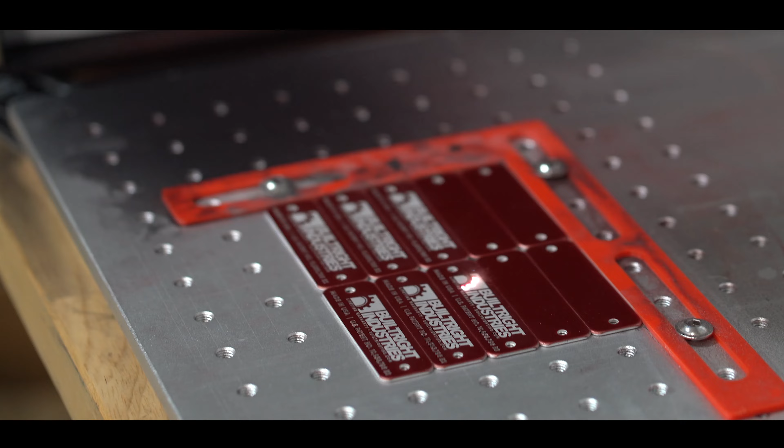All right, so last week you saw us do some 3D scanning and preliminary design of our Jeep dash mount, as well as experimenting with a MOLLE panel solution in the front cargo area of the Rivian. This week we're going to prototype both of those so that we can evaluate them for manufacturing, also for feasibility, and does it work for us? So check it out.

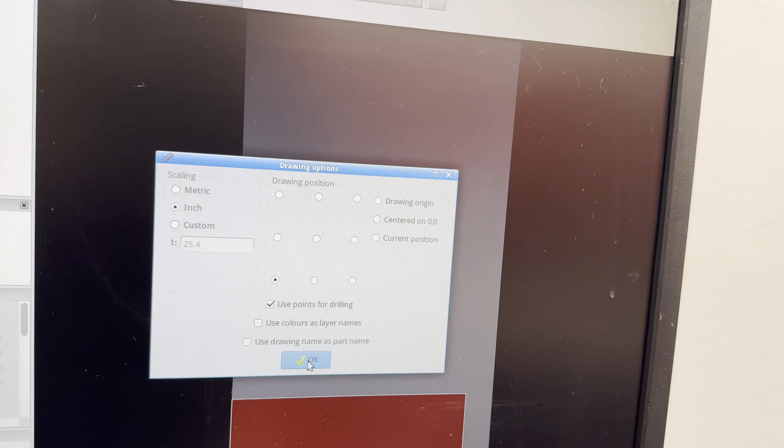All right, so I'm out here at the plasma table. I've got a piece of 11 gauge on there from when we did the Cybertruck panels. So I'm gonna pull our model of the top plate in, import a drawing, top plate.

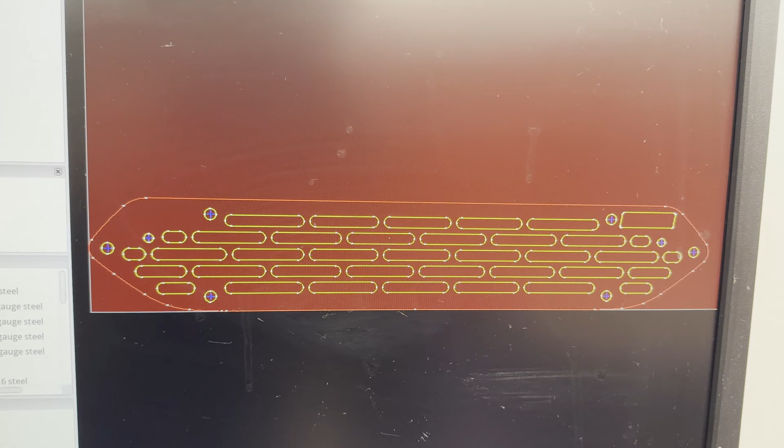All right, that looks about right. So the only thing I'm noticing is that this will be cutting basically from the bottom out to the top, and I want the clean part to be on the top. The cut is cleaner on the top. So I'm gonna flip this around Y. Yeah, okay, so this is exactly what we're looking for. We got the logo up here, we got the rest of this.

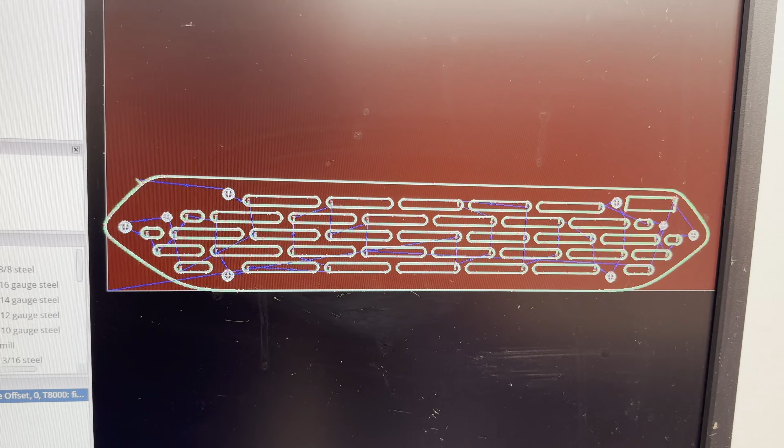So I'm gonna add an operation for plasma cut, outside offset. We're gonna move all the way down here to fine cut. There's tons of options here, but we have fine cut consumables. Say okay, quick sanity check, that looks correct. So now I'm gonna export the G code and we'll get this thing set up.

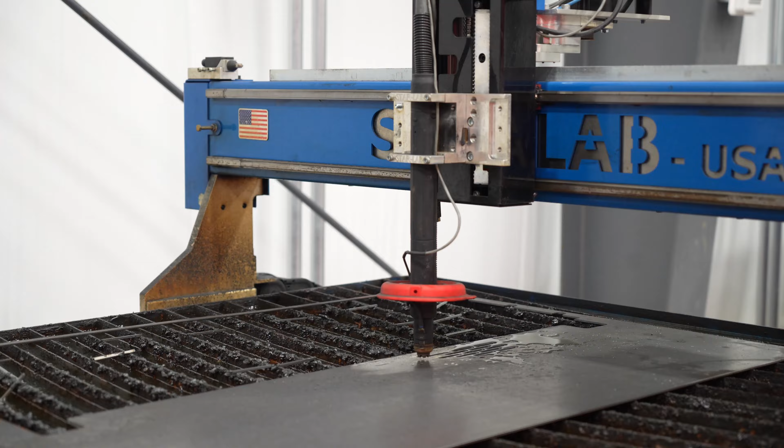All right, so we got our G code exported. We've got Command CNC open with our file here. I've got the plasma table centered down here. We've got a good clean origin. I wiped off the material. We're a little low on fluid here. The table's looking kind of gross, but I'm gonna give it a shot.

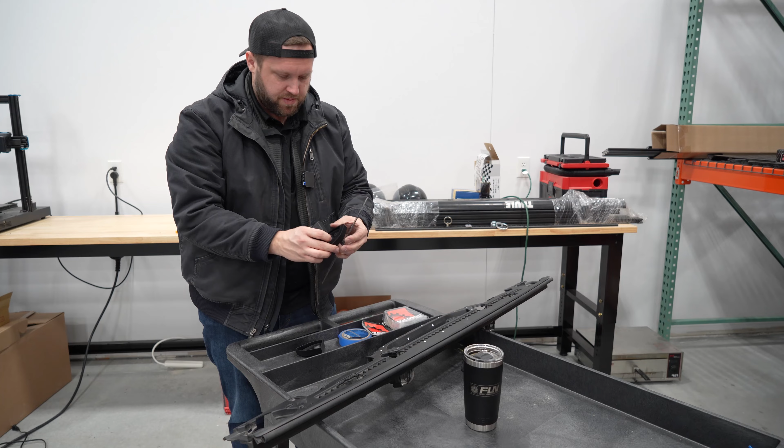All right, so we got a good clean cutout of the top plate. I'm gonna do a little bit of cleanup on it. We'll hit it with some paint and then we'll go and test fit it.

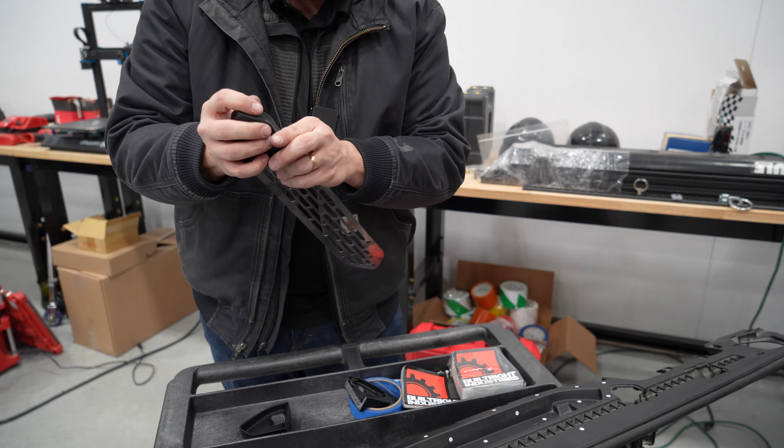All right, so we've got our two 3D printed pieces here. I printed these last night. Remember we started with this shell piece last week to verify the contours here, and this is getting a little bit closer to a production part. And then we've got this top plate that we just cut. I'm gonna do a little bit of a sanity check fit here on these parts before I go and paint this and we install it.

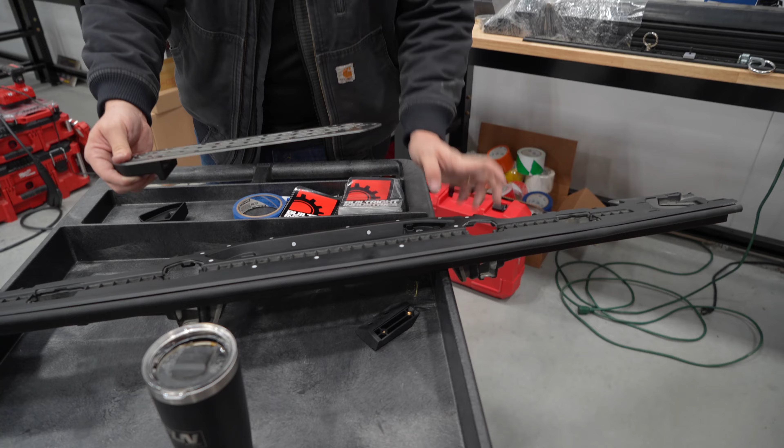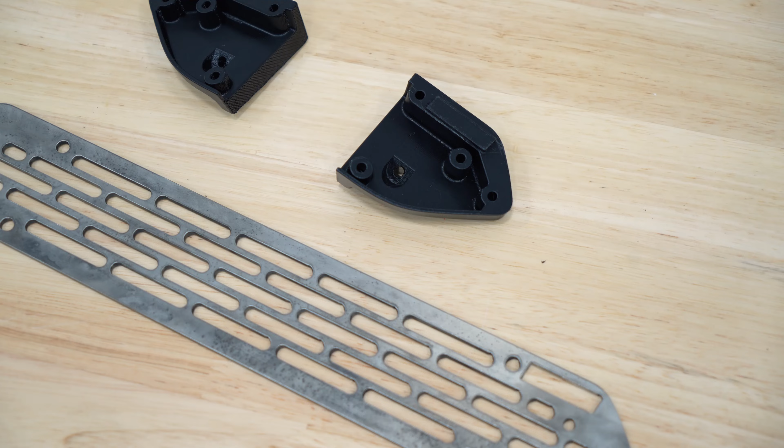I designed it so that this molded piece over here has a section that'll have our logo and come through the top plate. And this top plate, a lot of these look like straight edges, but they're very slightly bowed to match this contour really well. That's something that I think will set us apart from a lot of the other options out there. But as you can see, even as a crude plasma cut part, that's a really nice fit.

So I'm gonna add some threaded inserts to these feet on either side, and then we'll kind of do a real test fit.

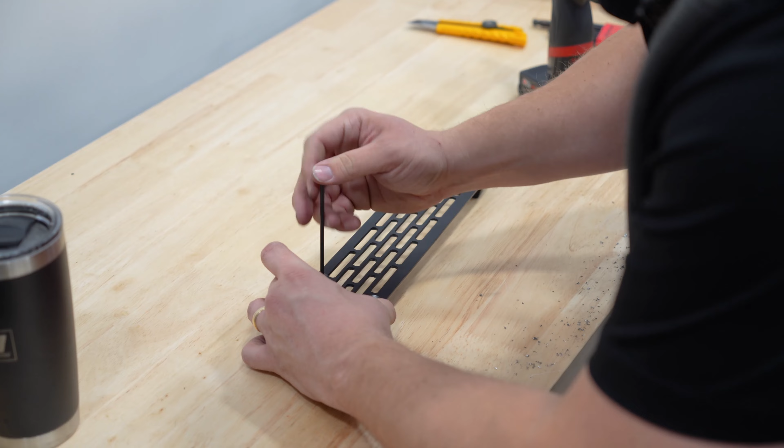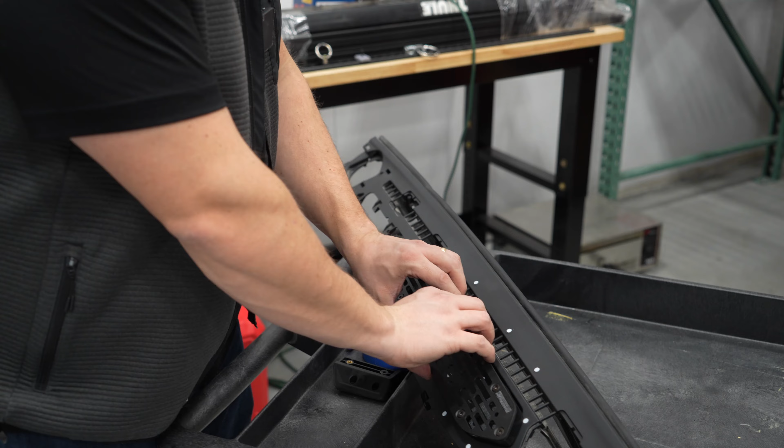So I'm assembling this on the bench because I'm just gonna drop it in that trim piece to test fit, but the real installation procedure is that you would install each of these blocks in the vehicle, and then this top plate easily is bolted down or removed if you're reconfiguring with mounts, that kind of thing. So this is not really how you would install this.

All right, that fits pretty nice. The factory, the production piece, I think will sit just a touch lower. And these countersinks will be a little tighter. But other than that, this is pretty close. I think I'm gonna add a slot up here. And then I was thinking about adjusting this feature to be compatible with the spin lock feature of our Mountech ball mounts to make that installation and use super, super slick. But this looks great. I think we're gonna roll forward with that.

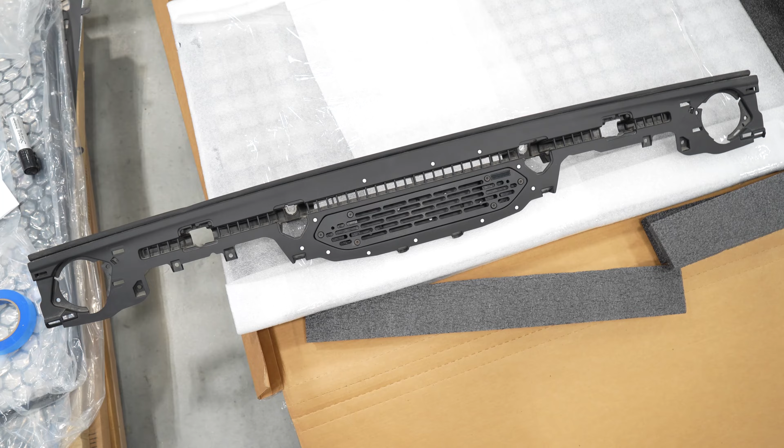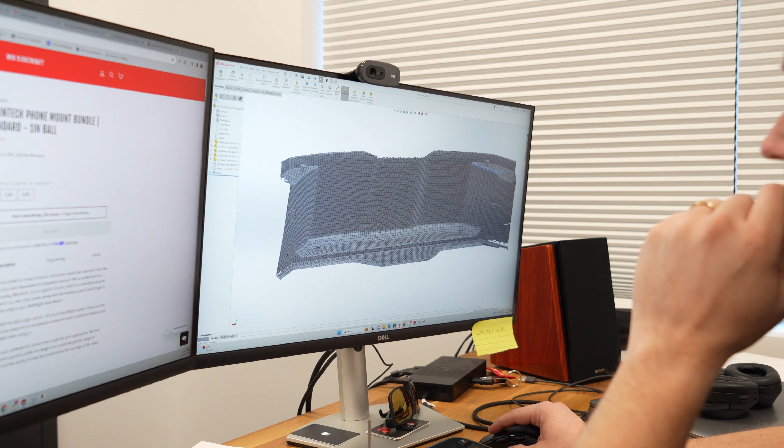All right, so I have the 3D scan of the front of the Rivian frunk area, the front cargo area. I hate saying frunk. Some people are calling it the frunk, I don't like saying that. So what we got here is the metal panel, it'll probably be 1/8 inch aluminum. And then we have the pegs that are in the Rivian cargo area. I've got one here in my hand.

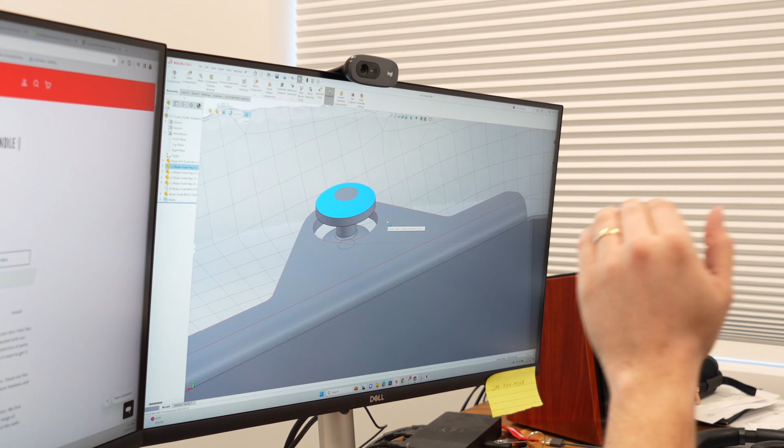And that's what this is. The thing is, to remove these from that tub, you need to remove the tub in order to depress these tabs. And I'd love to be able to have this panel able to be installed without removing them. So what we're doing is cutting a hole that's just slightly larger, and the panel is essentially going to drop straight down onto it. Obviously then it's floating around loosely.

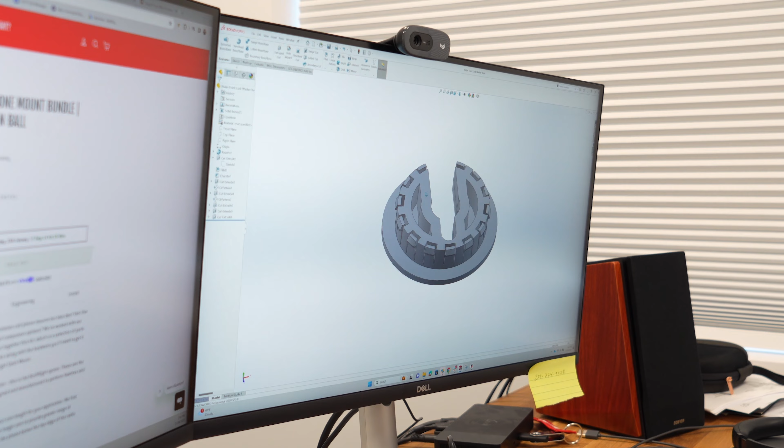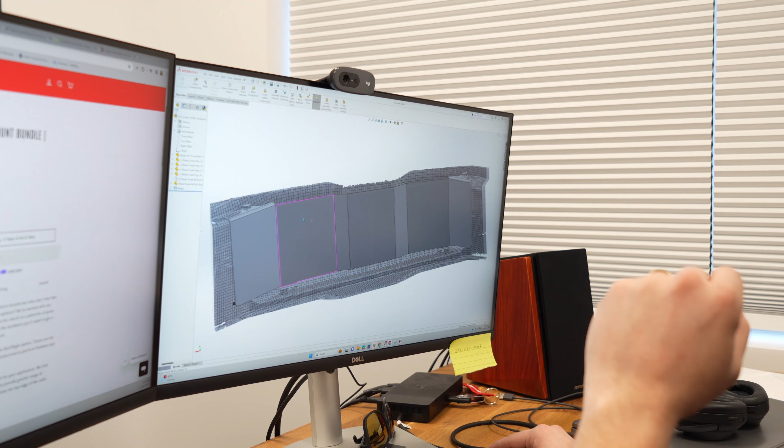See if I can change its color. Make it green. It's festive. It kind of follows the contour so we don't lose a lot of bed, but the idea is this would be a place to be tying things down to, attaching pouches, whatever it is, just provides some sort of structure inside this cargo area.

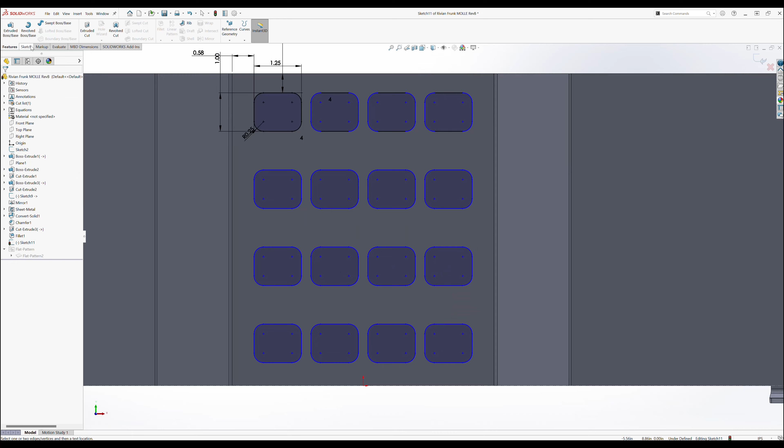So what I have left to do is I'm going to lop off the corner here, because I think I'm going to have to do that in order to get the cover to be able to flip up and clear that corner is going to be tight. And then I'm going to add the MOLLE features here. We'll flatten it, and then we'll go cut it on the plasma table and fold it.

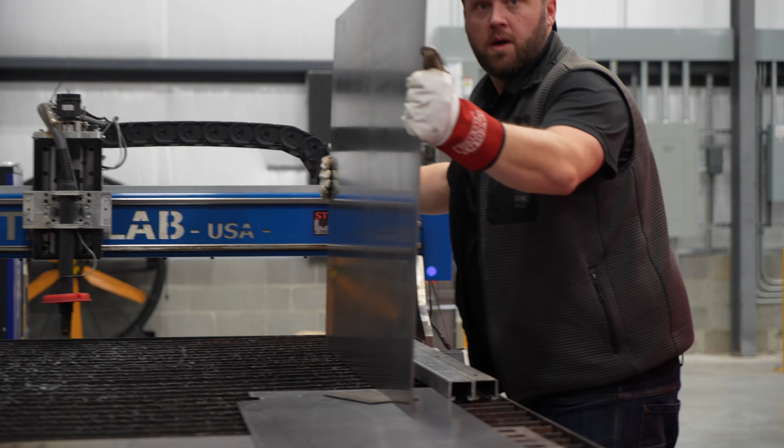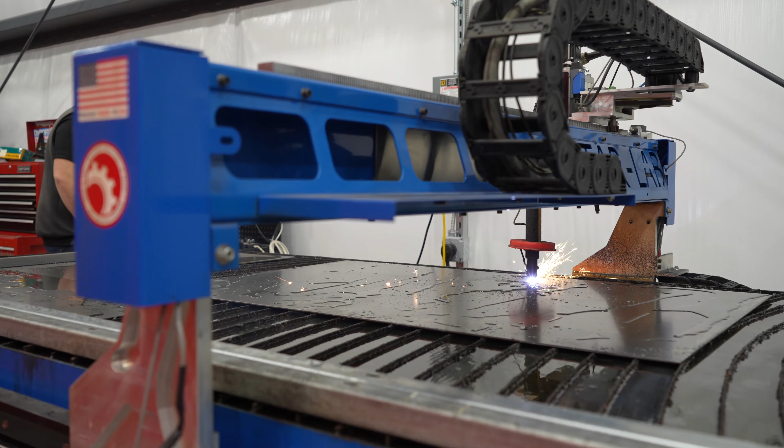All right, so we're back here at the plasma table. We got a fresh piece of steel here to cut this out of. Production parts would be aluminum, just like our other Rivian stuff, but we happen to have steel on the table and easily available. So this is 11 gauge steel. I'm gonna go ahead and get this started.

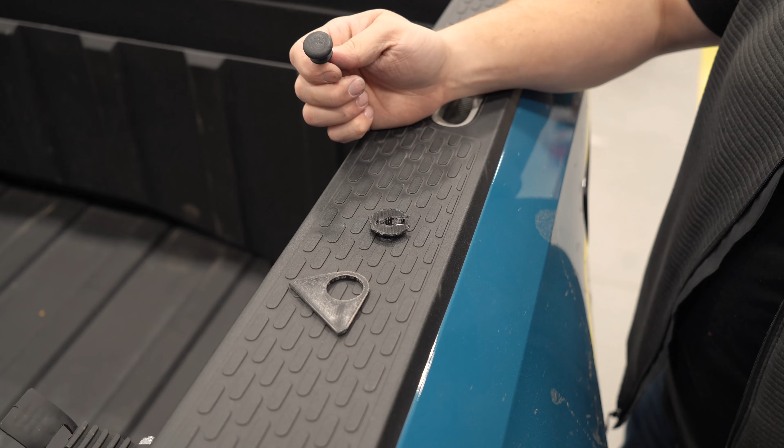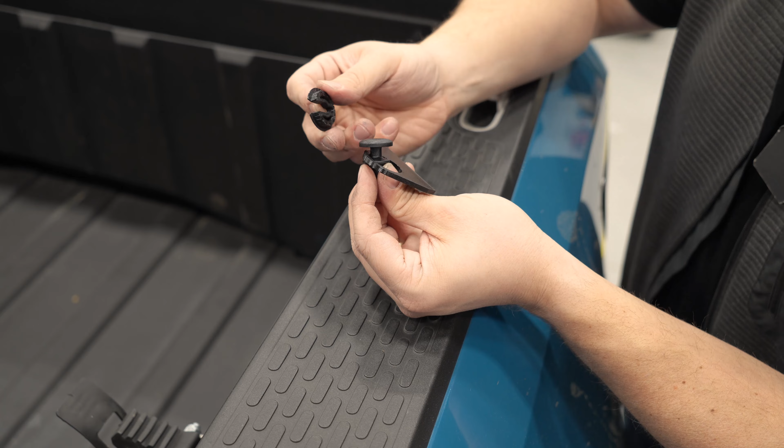So as far as mounting this panel to these posts that are in the front cargo area without having to take the tub out, this is that post we mentioned. This is just a printed representative tab from the panel. So you would essentially slip this over there. This would be sitting against the vehicle. And then this washer with these little locking fingers on it would slip through here, snaps around there. And then the panel comes up and snaps in there. So now the panel is captive, centered on that post because of that washer.

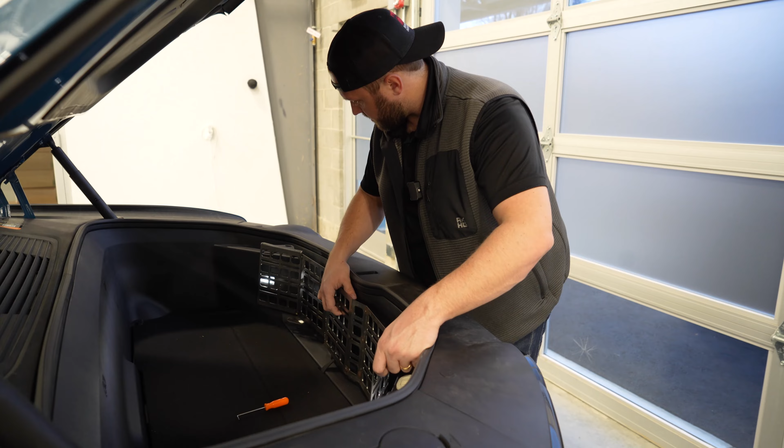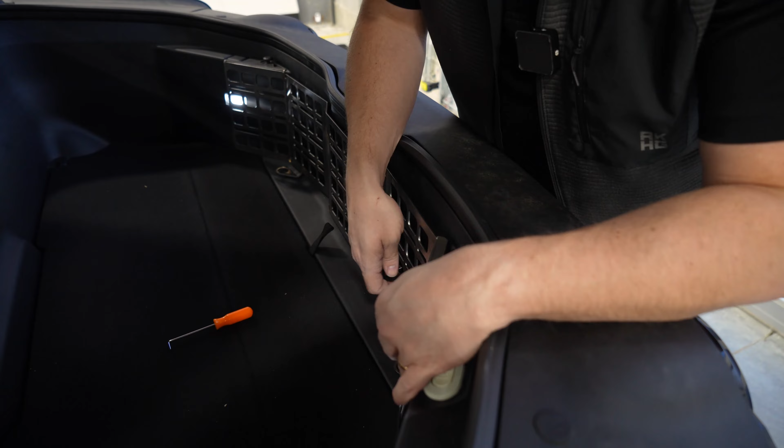Gotcha. I wish I had the ability to prototype that washer a little bit better than we do. We may have to call a friend for some help. All right, we got our prototype here. It's pretty crude, but it's looking like it might fit. Slipping it over the posts. Now I'm missing the one down here because it's the one I was playing with at my desk.

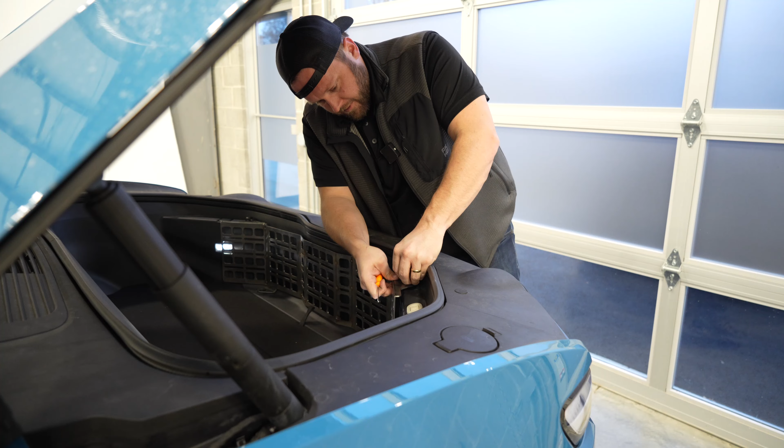So at this point, right, it's just loose. But this little clip that I designed should be able to snap over the post, and then the panel should snap up into it. It's pretty much engaged.

So this, I cut these back actually just to make the prototype shorter, since this is a straight area. But because of this, there's a little bit of interference right there, so we'll have to lop off part of this corner if we want the panel to extend even this far. So I can simulate this in the model pretty easily. I don't want to worry about it. I'm primarily interested in the mounting points and the mounting solution right now.

All right, so we got both of those products, or projects I should say, prototyped. The Jeep Gladiator and Wrangler dash mount looks awesome. That turned out really well with those 2 feet and the top plate. It looks really nice, I think it's gonna be really useful. So that is probably very, very close to the production version.